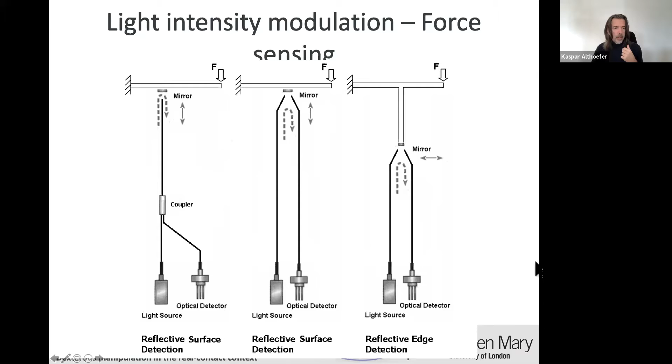We have also looked into measuring the light loss within the fiber, and I'll talk about this a bit more later. Here we can see another view. We have also modeled that mathematically, and then really started implementing this approach.

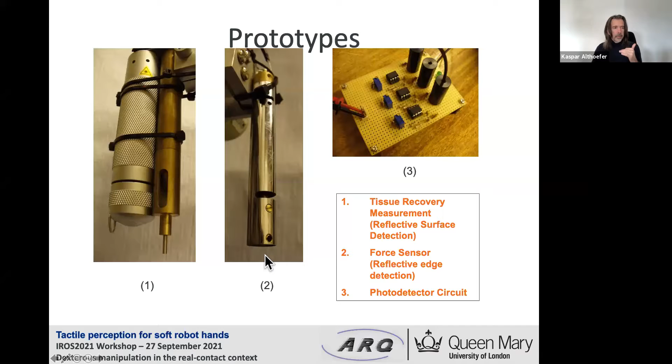We moved from very simple structures to start with. For example, here you see this cylindrical structure that has a cut, which allows a slight bending if a force is applied, and that changes the displacement of our mirror, which we can measure optically.

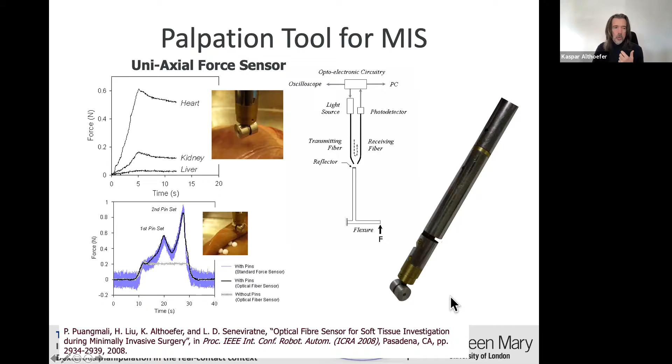We have integrated that into tools for the medical sector, such as minimally invasive surgery (MIS), allowing us to create systems like this one, where we have a roller that can be rolled over tissue inside a patient during laparoscopic or keyhole surgery, distinguishing between areas that are softer and those that are more stiff. In this way, we want to distinguish between healthy tissue and diseased tissue, identifying tumors.

You can see that also in action. Unfortunately the second video doesn't run, but here you see one of those tools we have developed with the optical sensor integrated.

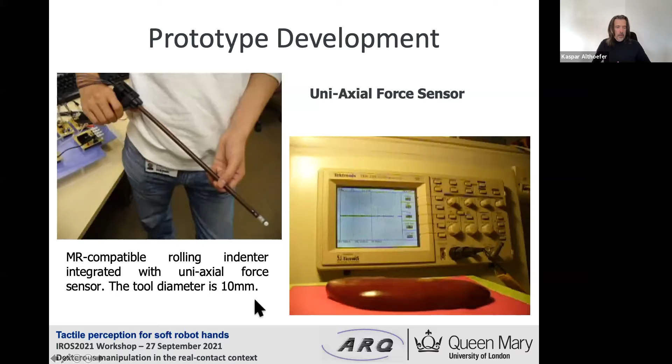At the beginning we achieved diameters of 10 millimeters. Now it's working - you can see the sensor in action here. I'll try to move forward, but this doesn't work, anyway we'll give it a few seconds. As you can see now, we place the roller.

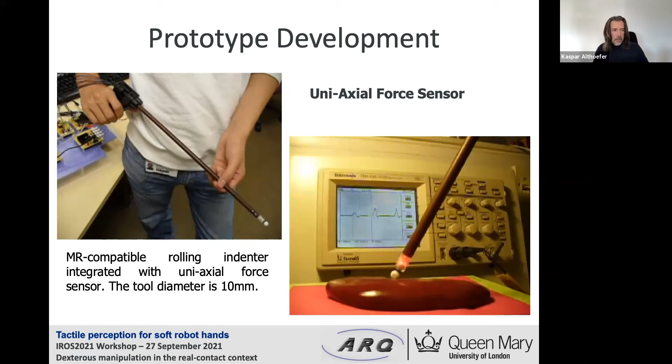We can roll over it, and whenever we are in contact with the tissue, we have a force signal, and that is shown on the screen in the background.

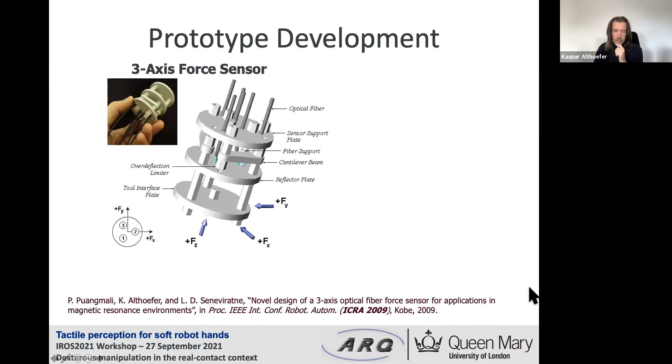Very important for us was to push miniaturization towards integration with smaller tools, and also to achieve multi-axis force sensing. So to start with, our system was rather clunky.

You see it here on top. We are talking about a 5 centimeter diameter and a huge, self-made electronic system to read out the data coming from there.

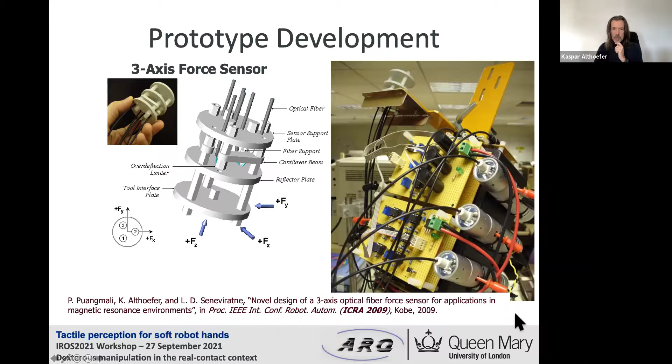This was already a 3-axis force sensor, but we managed then to miniaturize this down to 10 millimeters. This is also a 3-axis force sensor, and you can see now forces applied in different directions lead to different signals. So we can identify force and direction of force.

We also pushed that further. Our thinking here was to create tools that can be used in a medical setting, but also generally there was the idea to create robotic hands and robotic fingers equipped with tactile sensors at their tips to measure information from the environment.

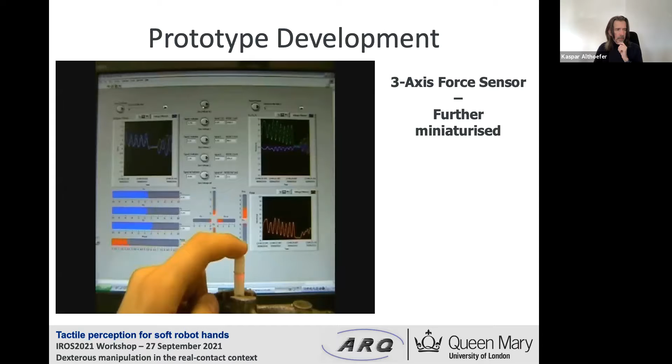This is now, I believe, around 6 millimeters, and again a 3-axis force sensor. We also developed further miniaturized systems, bringing it down to around 3 millimeter diameter.

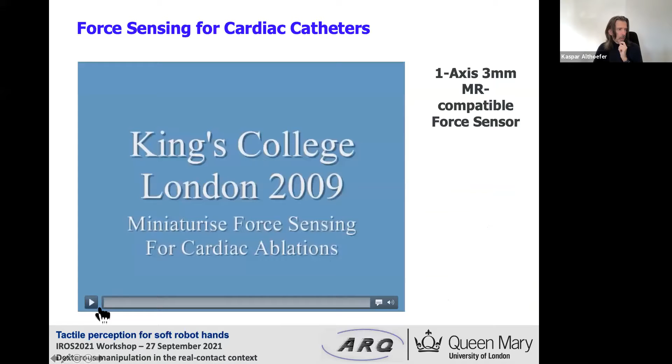Here we have a combination of different sensors integrated that allows us to, for example, measure forces at the tip of a cardiac catheter, a catheter that can go into the heart. So we're talking here about 3 millimeter diameter now.

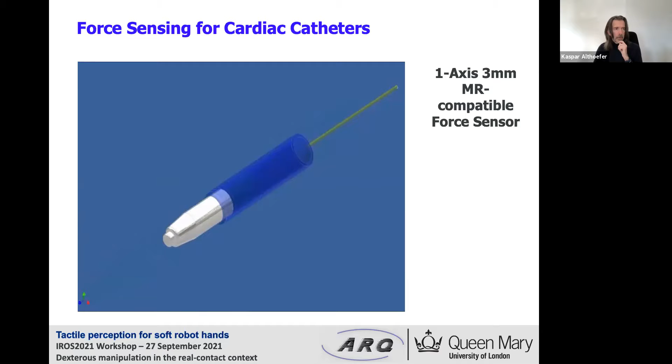The first system was a 1-axis sensor, and forces at the tip could be measured, and you can see that here in action. So we are at 3 millimeters, and we were able to also create systems with 3-axis force measuring capability.

Here I would like to talk a bit about our attempts to move towards measuring forces inside a soft robotic system. In the early case, we looked at integrating one of our force sensors inside a soft device.

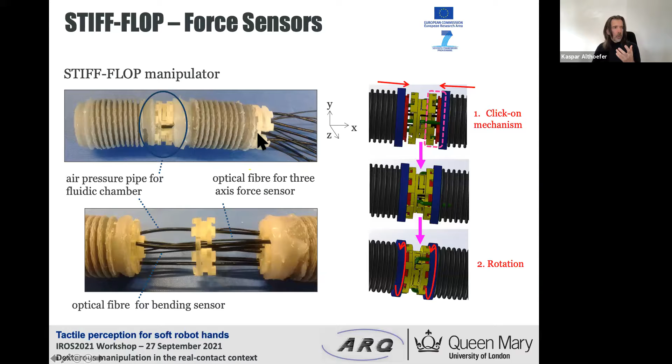This was also part of our EU project STIFF-FLOP, where we were developing soft robotic devices for minimally invasive surgery. Here the idea is to integrate these force torque sensors within our otherwise soft structure.

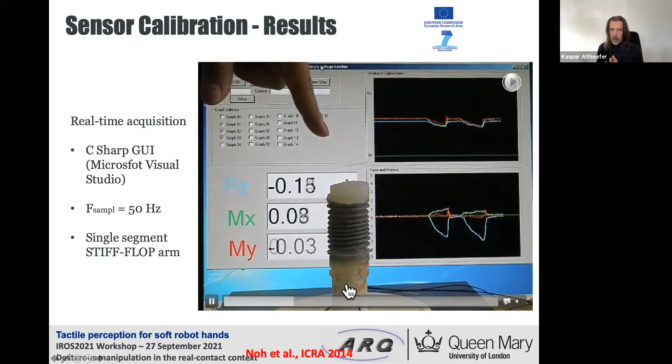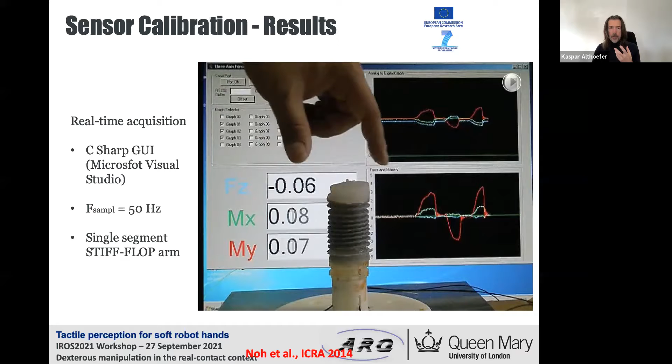We also did some finite element analysis, but I would like to come straight to this video. Here the sensor is at the bottom, and if you want, the problem of measuring forces at the tip is solved, but obviously it is via the soft body, so it is not very accurate, and we need to model our system to relate the forces measured at the bottom to the tip.

We have also looked into tactile sensing integrated with those soft robotic devices. Again, we apply the same approach of using pairs of fibers that send light to a small structure, integrated with a soft sleeve that can be pushed over our soft robotic device, capable of measuring pressure information at various points along the structure.

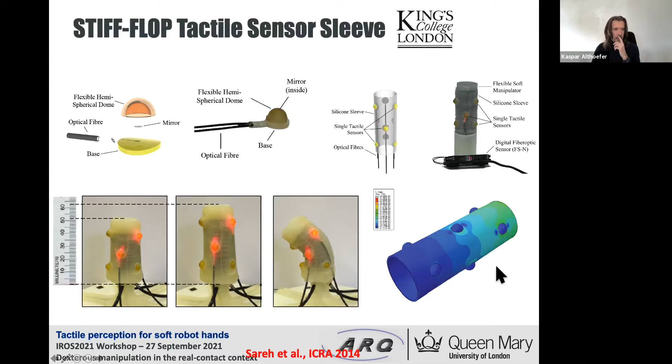We were quite happy with that, but the fibers are still just flexible, not stretchable, and also the sensing element itself is more rigid than the rest of the structure. So yeah, some improvement there, but not quite there yet.

I would like to also let you know that we looked into extending our camera-based idea. We looked here at integrating array sensors, tactile array sensors into the fingertips of robotic fingers. You have here an array of 3x3 touch-sensitive elements, and again, they move when a force is applied, and our optical pairs allow us to measure the change in light intensity.

And again, here we are using a camera to receive the light intensity values. In this example, we have 9 tactiles, but you can appreciate that this can be extended to larger scale systems with more tactiles than just nine.

So that's the approach we pursued based on optic fibers. More recently, we've also looked into light guides. Instead of using optic fibers, we use transparent silicone rubber that is very suitable for integration with soft robotic fingers. In this case, we have the soft structure, our soft robot finger, and we shine light through this soft material. It is totally transparent, and it keeps the light in there.

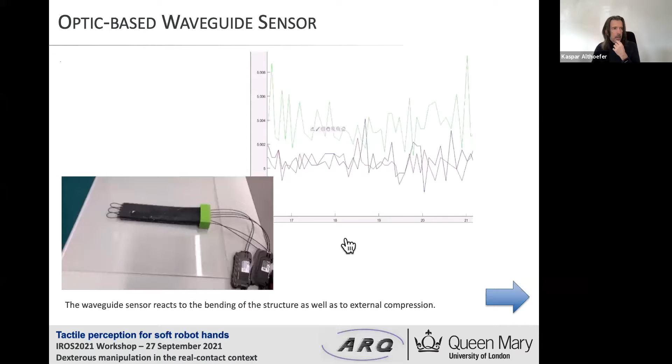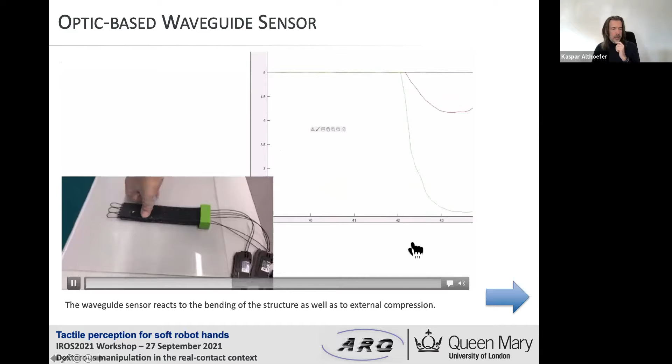We explore the idea of using this kind of material to measure pressure information. Here we have 3 soft light guides integrated in this soft finger, and when you apply pressure at different points, we can see that leads to a changing light intensity, which can be related to the forces being applied.

I want to make one more point before I conclude. What's also very interesting, and worth further exploring, is using 2 sensors to measure the stiffness of soft objects. Here we're looking into integrating force sensing and proximity sensing. Our approach is quite suitable - we use the optics-based approach to measure force information, similar to what I explained at the beginning, with cantilever structures that allow us to measure forces in different directions.

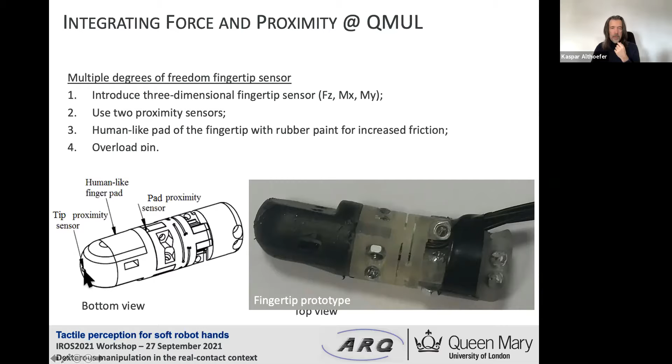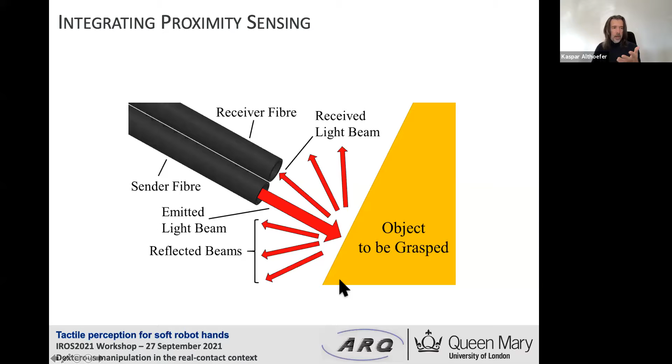In addition, we integrate proximity sensing, indicated by this section at the front, where we apply the same approach using optic fibers. Instead of shining light against a deformable surface to measure pressure, we shine the light straight onto the environment to measure the distance between our fiber tips and the object we observe, for example the object to be grasped.

We've developed a number of different types of fingertips, but the main idea is to measure tactile information through these movable tactile elements on one hand, and have our proximity sensors integrated on the other hand, allowing us to observe the distance to nearby objects. One clear approach is to use that when the finger is approaching an object, to understand how far it is before we even have contact.

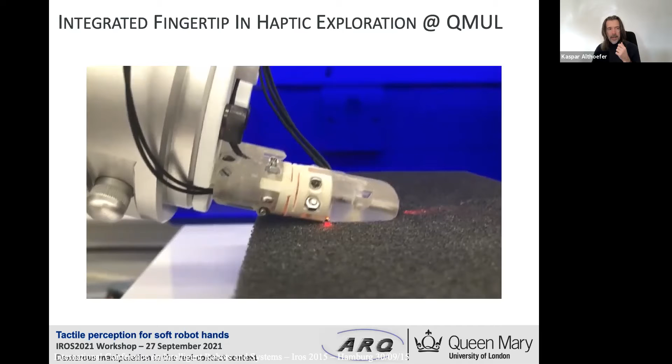But I think what's also very interesting is to explore whether we can use these two pieces of information - the tactile or force information and the proximity information - to actually get an idea of the stiffness of an object being touched.

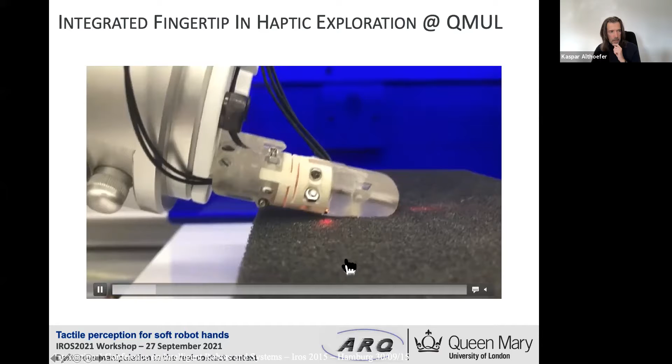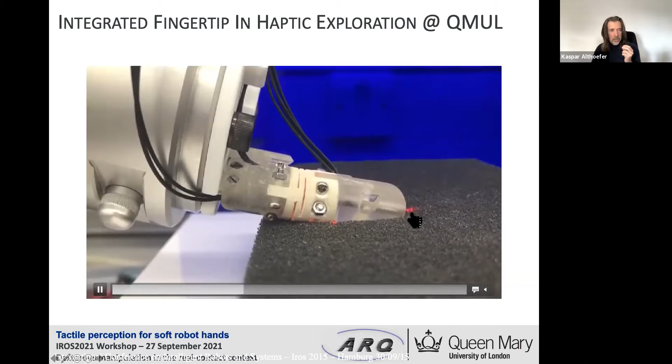So you can see here, going back a bit - we have this foamy material, and our fingertip is pushing inside, and the force sensing element is deforming slightly so we can measure forces. But at the same time, we can also observe how the distance to certain areas of the object is changing, giving us an indication of the deformation. Bringing those two pieces together, we get an indication, or can calculate an estimation, of the stiffness of the object being grasped.

Thank you. Thank you, Kaspar. Thank you very much for sharing such excellent...